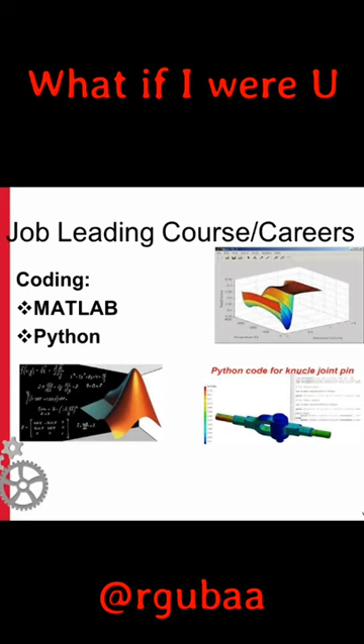We need to feed the formula into Python code or a MATLAB algorithm, and we need to give sufficient boundary conditions, so that it will automatically plot the PV diagram, and this PV diagram is more accurate than your manual calculations. Okay, this is how coding is helpful for us. Hope you all understand it.

CAD, Computer Aided Design. AutoCAD is where it all starts. We drew a lot of engineering drawing sheets in our engineering classes. Let's just do that with more accuracy and neatness, in a format that can be sent around the world at any point of time. Learn software such as CATIA and SolidWorks, which are helpful for designing any product. CATIA is an efficient tool for 2D surface modeling, and SolidWorks is a very helpful tool for 3D modeling. You can design any object. For example, you can design a Harley Davidson bike or your favorite Royal Enfield bike. Trust me, this is a very fun tool to learn.

For example, if I ask you to manufacture a 25 mm hole in a plate, can you manufacture it with the exact dimension of 25 mm? No, you cannot, because there are certain errors in a machine tool which will affect the hole size, right? So a product engineer always allows such slight deviations, which we call tolerances, on the product without affecting its functionality, right? So GD&T talks about this.

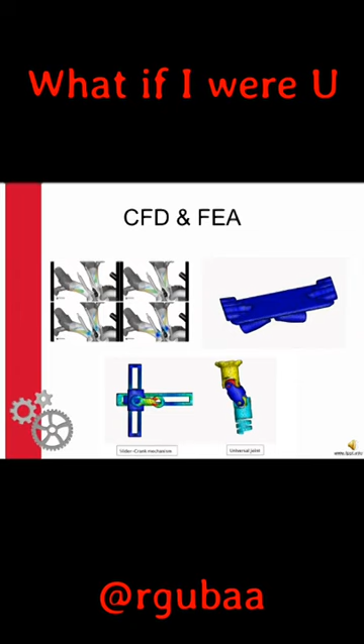CFD and FEA, both these courses come under CAE, Computer Aided Engineering. CFD stands for Computational Fluid Dynamics. FEA stands for Finite Element Analysis. Let's talk about CFD and FEA. CFD, Computational Fluid Dynamics. Have you ever thought how engineers measure temperature inside an engine during combustion, or how engineers know the fuel flow inside any engine?

Obviously we cannot send a camera or thermometer inside an engine when it is working. The physical conditions will be too extreme to be measured directly. This is where CFD comes into the picture. Using CFD, we engineers build a virtual environment where we can test the systems and acquire approximate results. It is also economically positive since computer simulations are way cheaper than prototypes. We can compute flow of any liquid or gas in a system using CFD and acquire the needed readings.

CFD is important because of three main reasons. First, it is cost effective and time saving. Second, it can investigate flow of liquids in challenging conditions. Third, it provides detailed insight into flow behavior. Let's take a heavily loaded truck example.

A heavily loaded truck obviously consumes more fuel because it has to oppose a lot of drag force acting on it. In order to reduce the fuel consumption, one engineer came up with the idea of modifying its aerodynamic design. In order to verify his aerodynamic design, there are three possible tests any manufacturer can perform. First, the road test. Second, the wind tunnel. And the third, the CFD.

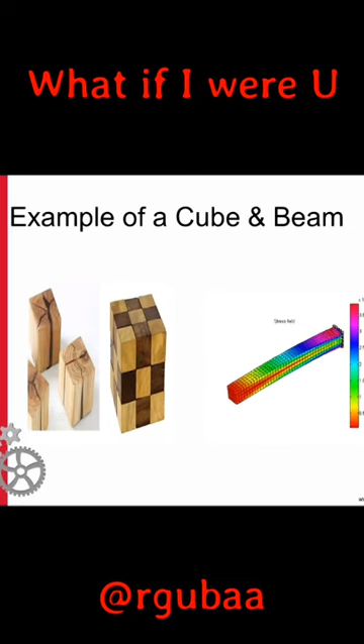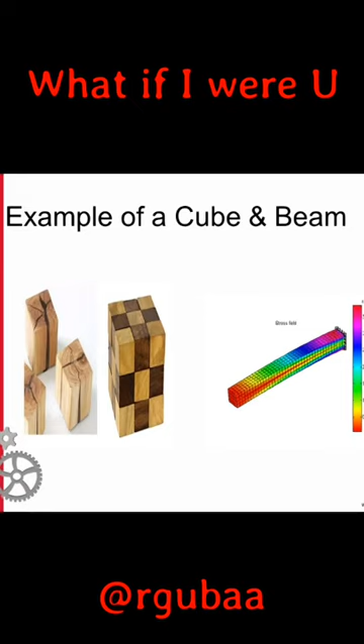Let's take another example of a cantilever beam as shown in the adjacent picture. Here, a beam is subjected to finite element analysis to see how it will react to the stress. For example, if the force is applied on the extreme end of the beam, obviously there will be stress acting on the various elements, right? The pinkish finite elements that you see on the screen have the maximum amount of stress.

Obviously this is a cantilever beam and you are applying force from the other end, so the bending moment and the bending stress will be acting at the fixed side, because the critical element will be residing in that place, right? So the stress field is concentrated more towards the fixed end. This is how FEA works. This is helpful in analyzing computations acting on any product which is acted upon by forces. This is how FEA helps.

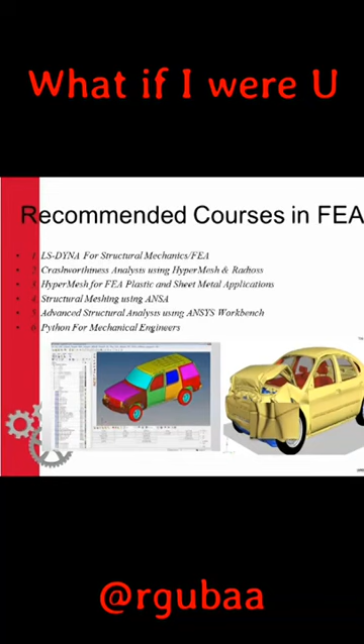Below are the recommended courses in FEA. LS-DYNA for structural mechanics or FEA, crashworthiness analysis using HyperMesh and Radioss, HyperMesh for FEA plastic and sheet metal applications, structural meshing using ANSA, advanced structural analysis using ANSYS Workbench, Python for mechanical engineers.

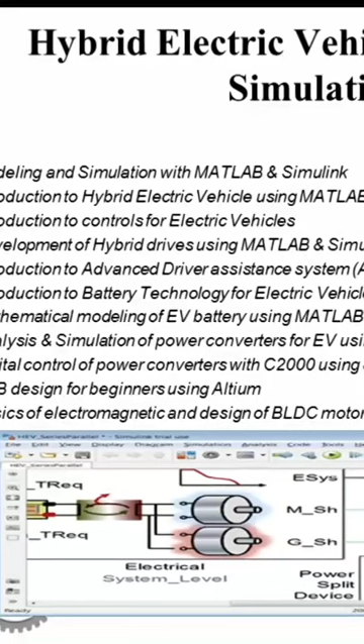We all know that all vehicles run on diesel or petrol. These combustion fuels are produced from non-renewable sources of energy. Because of these fuel emissions, pollution and climatic changes are happening all across the globe, and there is a definite need for us to shift towards cleaner energy, that is renewable energy like wind turbines and solar power. If you remember, our Transport Minister Nitin Gadkari announced in 2017 that India is aiming to have 100% electric vehicles on roads. EVs reduce emissions that contribute to climate change and smog, improving public health and reducing ecological damage.

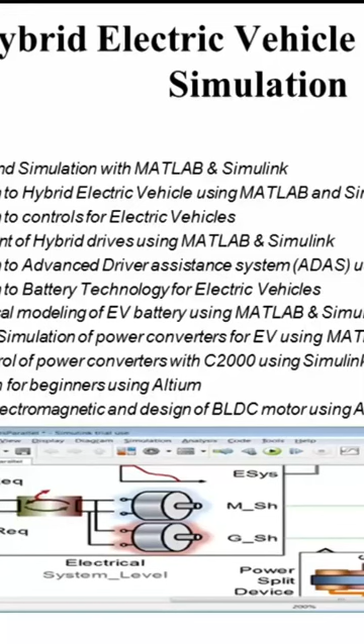So there is a shift, with every automobile industry investing heavily in R&D and towards EV design. If I am not wrong, the EV industry will be ruling in the next 10 years. So I recommend all of you to learn some courses particular to EVs, that is hybrid electric vehicle design and simulation. Below are the recommended courses which are particular to this industry.

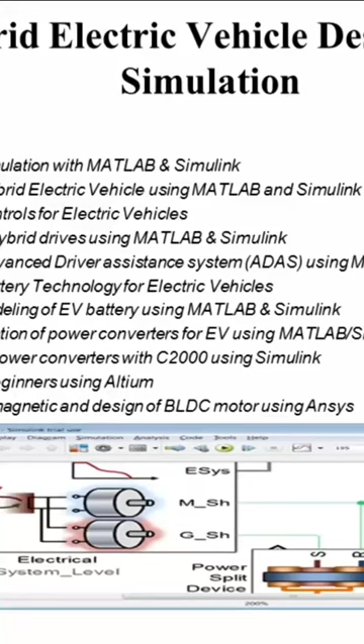Modeling and simulation with MATLAB and Simulink, introduction to hybrid electric vehicles using MATLAB and Simulink, introduction to controls for electric vehicles, development of hybrid drives using MATLAB and Simulink, introduction to advanced driver assistance systems using MATLAB and Simulink, introduction to battery technology for electric vehicles, mathematical modeling of EV batteries using MATLAB and Simulink,

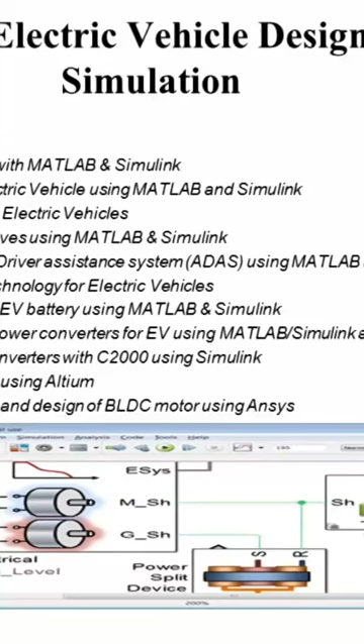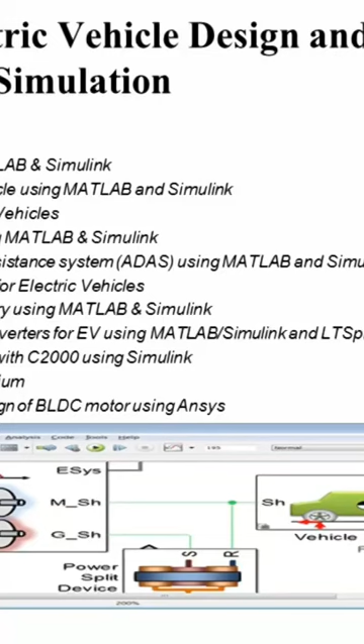analysis and simulation of power converters for EVs using MATLAB or Simulink and LTspice, digital control of power converters with C2000 using Simulink, PCB design for beginners using Altium, PCB stands for printed circuit board, basics of electromagnetics and design of BLDC motors using ANSYS. Do not panic with the terminology used in this slide, because this is a relatively new course for mechanical engineering. I think this is more known to electrical engineers.

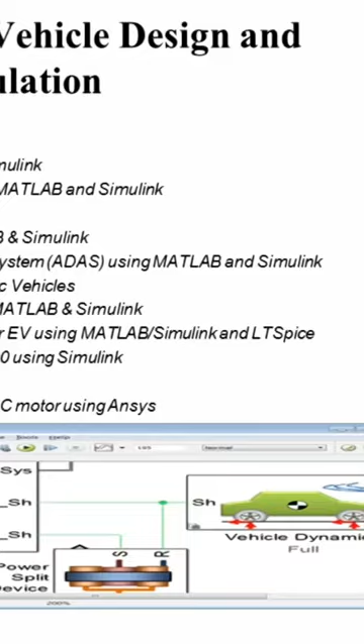Now the major question after listening to the whole presentation is, where will I find the resources to learn all these packages or software? Well, use apps like Coursera, Udemy, and follow YouTube channels related to CAD and CAE. Again, do not panic about the terminology that has been used in the slides. You will understand them easily once you get hands-on experience with this software. Today I covered only CAD and CAE related software in the whole presentation. I hope you all understood the presentation.